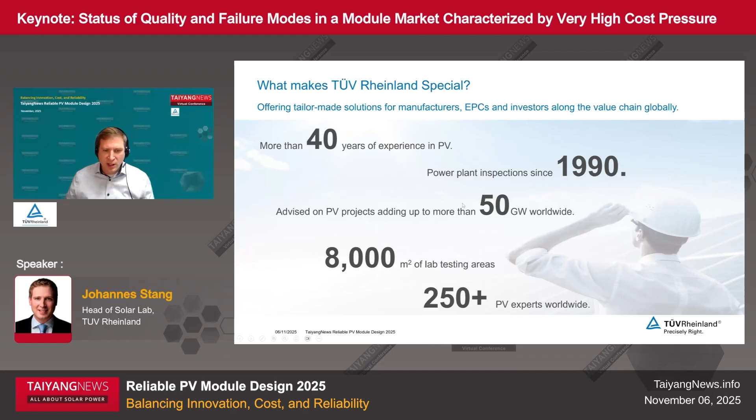Who's TÜV Rheinland? TÜV Rheinland is a global and leading TIC company - testing, inspection, certification. We have more than 40 years of experience in PV. We do power plant inspections since 1990 and have advised in over 50 gigawatt module installations globally. We have a testing capacity of over 8,000 square meters worldwide, done by 250 experts worldwide.

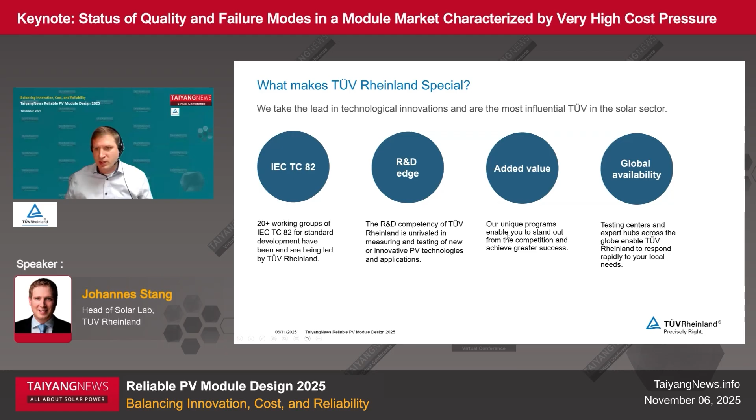We try to be very active in the IEC/TC 82, and we led more than 20 working groups to develop and improve standardization. We are also very strong in development of new test services and standards. So if a standard doesn't exist, we develop our so-called TÜV Rheinland specifications, the PfGs. We do that because we want to enable our customers to stand out from competition and to promote their products on the end customer side.

And this is done globally. We have a worldwide orientation and focus on all markets - the American, European, African, or Asian market. And we have offices and expert hubs globally.

The motivation of my speech today - I think you will all agree with me that the performance and lifespan of PV modules is directly dependent on the quality. And you will also most probably agree with me that even minor defects in material and manufacturing can lead to power loss, safety issues, or early system failures. And that is something we have to avoid.

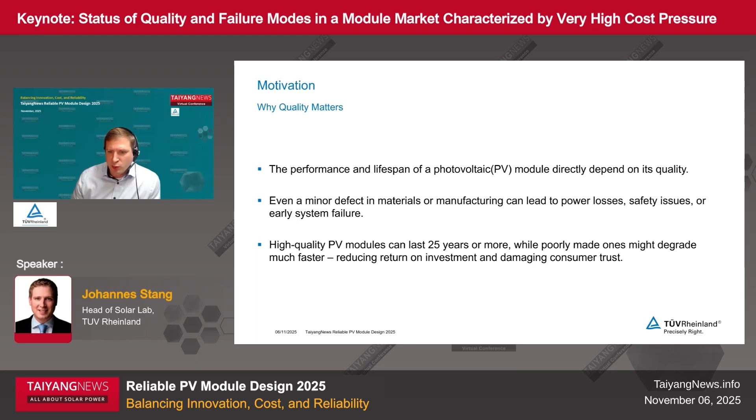Because only high quality modules can last for 25 years or more. On the other side, poorly made modules might degrade fast and can reduce the return on investment. And I think the most important point we should avoid is damaging customer trust.

That brings me directly to the quality aspects in PV modules. From our perspective, the quality depends on material, the manufacturing, and also the qualification testing. These 3 points can be further divided into 5 points. Material, that is clear, but the manufacturing itself can also be divided into production, process control, also staff - production operators - and last but not least, the testing and certification, which gives indication about the quality.

I think it's nothing new that a module consists of different materials. The structure can be different - a glass module or glass foil module with polymeric material, framed or unframed. But there are a couple of different points to be aware of to enable manufacturers to have a good PV module. And without good material quality, you will not end up with high quality modules. I don't want to go too much in detail in this slide, but I just want to give an overview and some ideas of what kind of quality aspects need to be considered when you select materials.

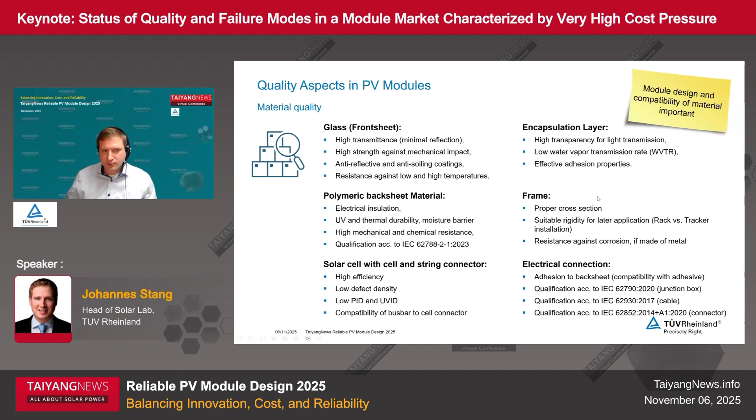As I said earlier, the quality depends also on production, and there are mainly 3 points. Starting with manufacturing quality, a quality system, ISO 9001. I think that is state of the art for manufacturers and companies having such a quality system, because it gives a good opportunity to go step by step through the processes and to improve processes and target the customer requirements.

From our experience and also expectation, it is very crucial that manufacturers do material inspections and external supplier audits, supplier qualifications, maybe also having a master list of suppliers to make a rating of different suppliers to see what is the best material source.

From our expectation or experience, local sourcing of machines, equipment, and service is also important, because having very short distances can lead to shorter downtimes of machines and also regular maintenance, spare parts, and everything else that goes hand in hand with local sourcing.

Supply chain management, from our perspective, is also key for manufacturing quality. You have to make, as I said earlier, supplier audits and have a very sophisticated management of the supply chain, also in terms of, for example, sustainability and worker rights.

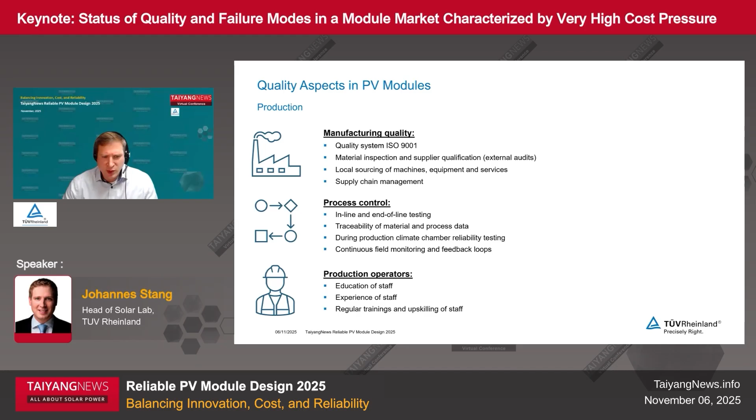The third point is testing and certification. It is clear that a man from TÜV Rheinland is now speaking about testing and certification, but indeed it is important that you have standardized processes and standards to prove the quality and safety of products.

The minimum requirement is type-approval and safety testing, targeting the infant failures of modules. That is not lifetime testing, but it gives good indication if the product has the ability to have a lifetime of 25 years or longer.

What we also do in the framework of qualification testing is regular production surveillance. I always tell my customers that it is not the police coming to the production. It is more a face-to-face, on-the-same-level discussion about production quality, to bring manufacturers in a position to improve, giving ideas and also points to be improved. That is a very good chance for manufacturers to improve.

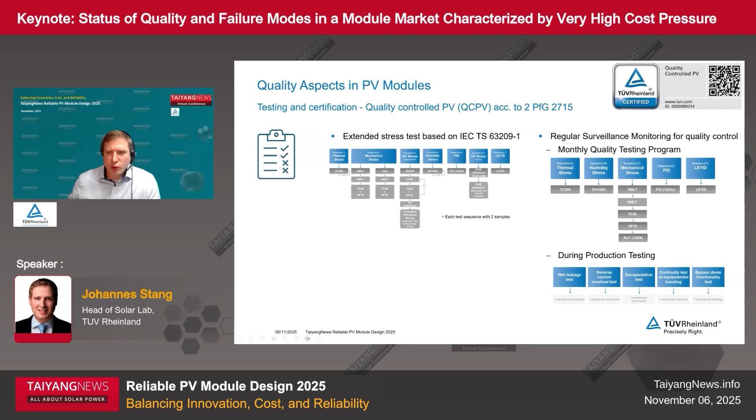So now we're entering the failure modes, and I think that is the keynote of my presentation, and it will support the idea. I just wanted to draw attention to the point that we had increased failure rates in recent projects. Recent projects are projects during the last year, and we found almost no project, meaning a qualification project or a test project, without observations, meaning visual defects or test failures in common qualification tests.

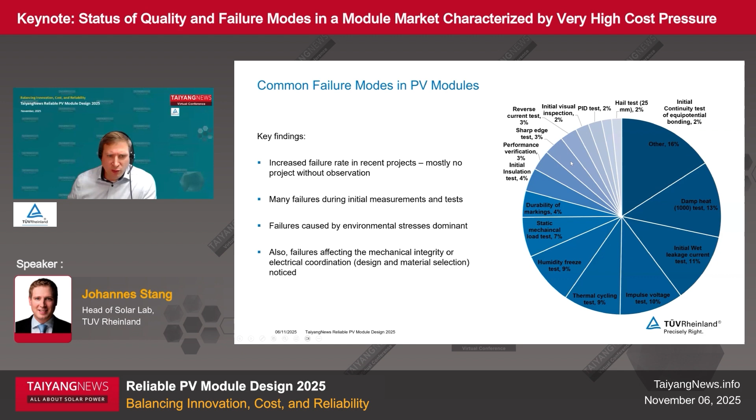To understand failure mechanisms and root causes, I put in this table to give common failure modes and also correlated failure mechanisms and root causes, because knowing the failure mechanism and root cause, you can avoid such failures. I could speak a day or longer about such correlations, and therefore I just want to give you the table so that you are aware of such failures, and maybe give examples of what we have faced in recent programs.

Mostly we see cracks in solar cells. We see moisture ingress and delaminations in modules. We see also discolorations of polymeric materials caused by UV radiation. And what's very common at the moment is power degradation caused by PID, LID, LETID, UV-induced degradation, and so on. And that concerns us, that on the technology side of solar cells, these points should be considered and also mitigated during cell production processes.

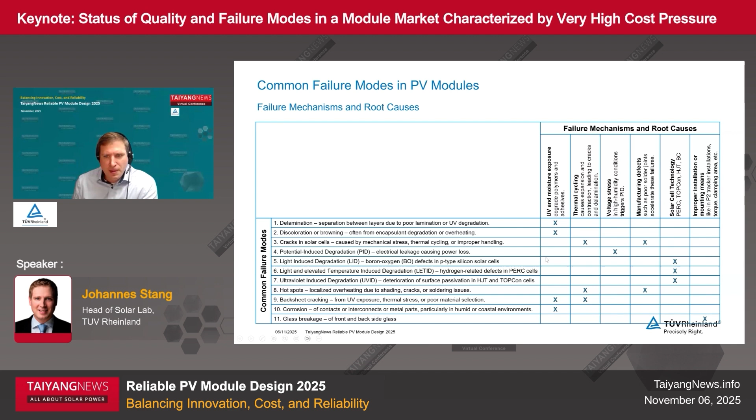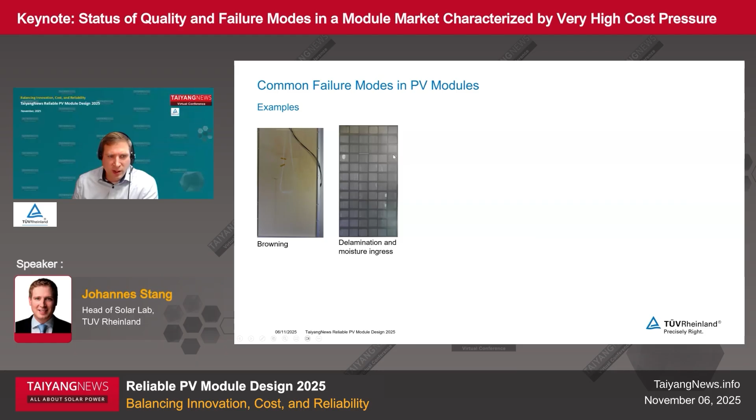Okay, now I will give you some examples. So we have seen browning, and I'm not talking about polymeric materials 10 years ago. That is what we have seen in recent projects. We see delaminations and moisture ingress. Here you can see that we still have modules, especially for niche markets, in our laboratory having smaller cells. We see glass breakages during mechanical load testing.

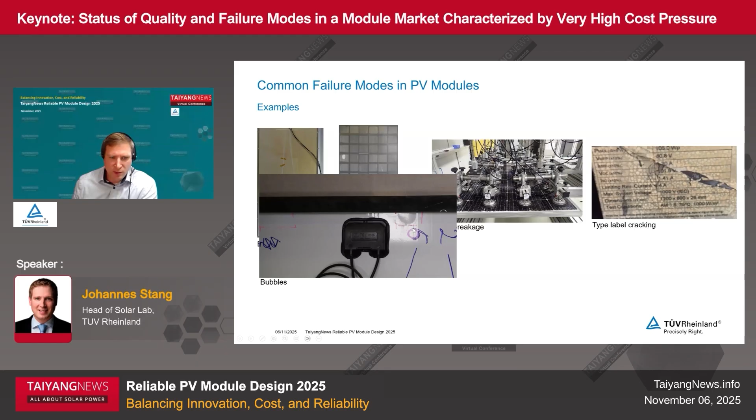We've seen that module designs have not been properly developed, for example, for 1P or 2P trackers, having an asymmetrical load application and leading to a dismantling or bending of frame pieces. That is very interesting. We have seen that type labels are cracking because of UV exposure. We see bubbles because of lamination issues, also very close to the module edge in the creepage distance, which guarantees electrical safety, for example.

We see delaminations also on BIPV products. I hope that you can see that this is a colored front-side glass, and I hope that you can see the delamination underneath. We still see hotspot defects, burns and delaminations caused by local overheating, leading to a melting of polymeric materials. And we see also bubbles in the creepage distances, which are very severe in terms of electrical safety.

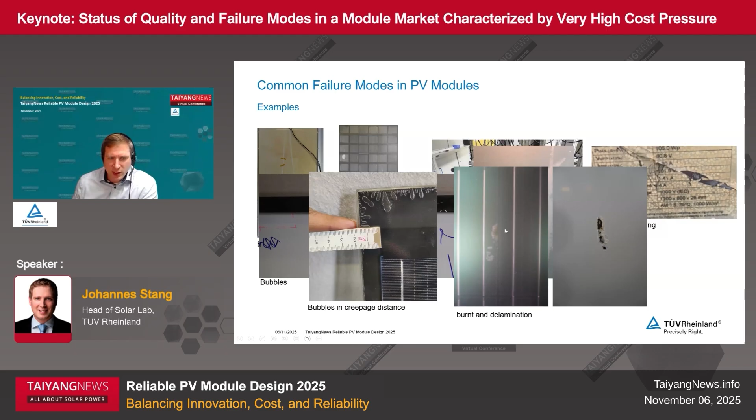But we see also not material-related failures. We see also observations for UV, ultraviolet induced degradations, mostly seen for N-type bifacial solar cells, for example, silicon heterojunction cells, and also for TOPCon cells.

I put in the slide on the right-hand side some 3 electroluminescence pictures. You see on the top a measurement in the initial state, and the second from the top, or the middle one, after 60 kilowatt hours per square meter of UV irradiation.

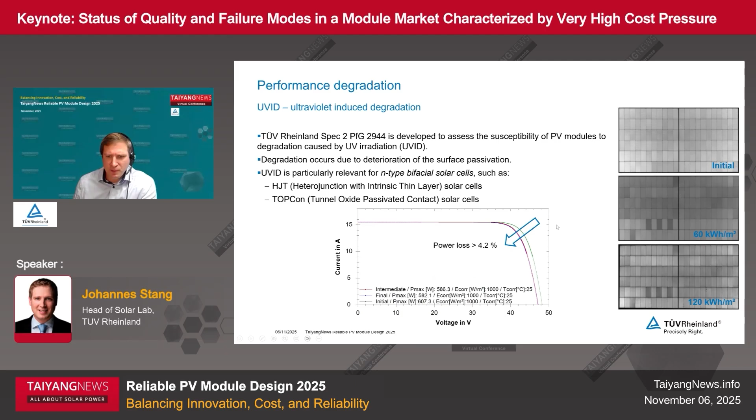And you can see already in the IV curve that after 60 kilowatt hours per square meter, you have seen a power loss of roughly 4%, and that there is no continuous degradation with a higher exposure of, for example, 120 kilowatt hours per square meter, bringing us to the conclusion that such degradations might be already completed after 60 kilowatt hours, and that can be over 5%. In this example, it is 4%, and that is very critical in terms of energy production and energy yield.

Yeah, as I said, we have also a lot of different TÜV Rheinland specifications developed to address mostly all failure modes we have seen in laboratory testing or in field installation of modules, with the aim to avoid them or to detect them as early as possible. That slide is just listing the most relevant standards.

We have, as I said, a lot more standards. If you are facing issues, you can get in contact with us. I'm pretty sure that we have standards and solutions available to address and to support you with all testings in the PV industry.

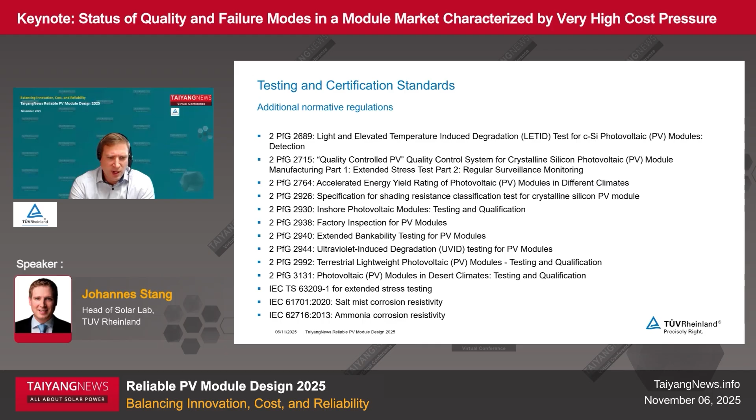The conclusion, finally: I hope that I could show that the module quality depends on the material integrity and manufacturing precision, and that testing can help with detecting failures. And I think it should also be clear that failure modes can be mitigated through proper material selection and proper process control.

Testing helps to detect failures as early as possible and to optimize the PV module design, and adhering to international standards can help PV modules have the chance to be reliable, durable, and efficient for 25 years or more.

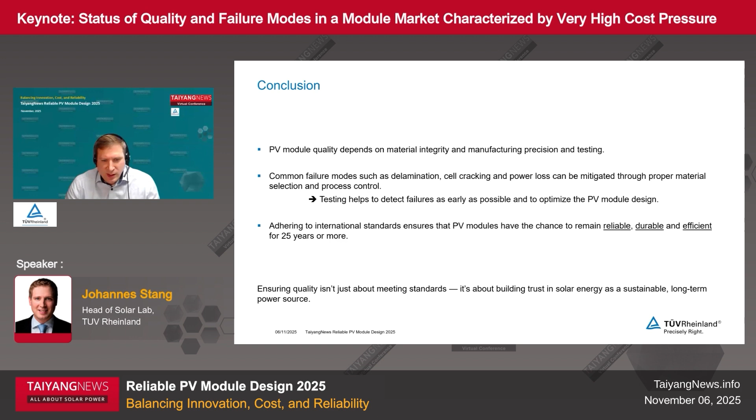I don't want to say that quality only exists when you're adhering to standards, but standards and testing certification can build trust in the product, in solar energy. And I think that is very important for end customers, that they see that products are safe and high quality.